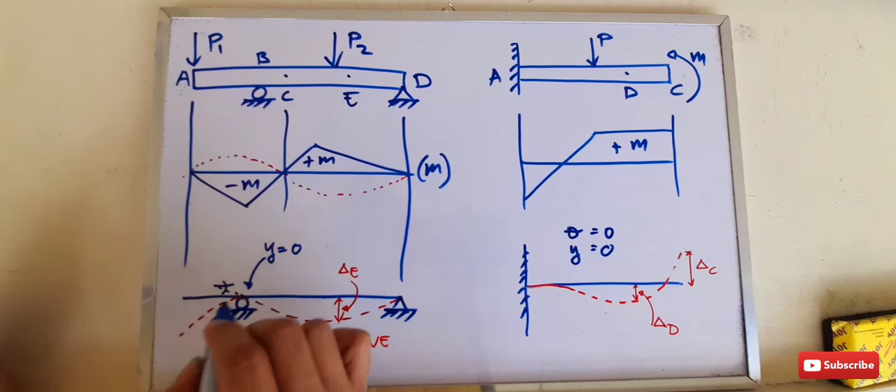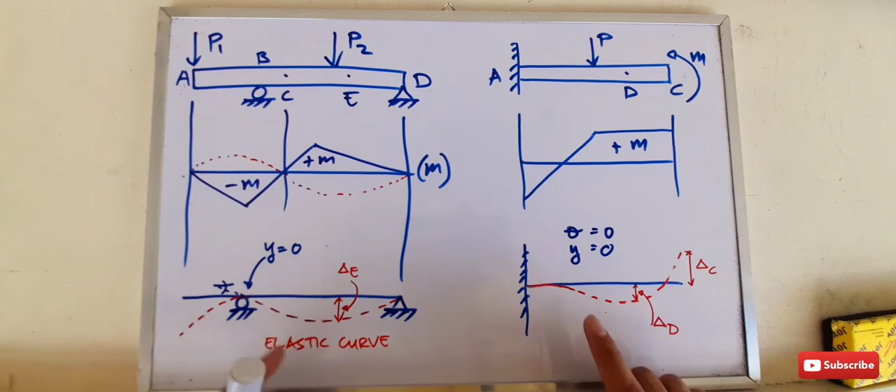These will help us later to get the deflection, or the displacement and the slope, at certain points in our beam.

The first method in solving for your slope and deflection is by integration, also known as the double integration method, because we integrate twice.

The first integration will give us dy over dx, which is the slope of your deflection diagram or elastic curve. The second integration gives us y, the value of the displacement. This is the process of the double integration method.

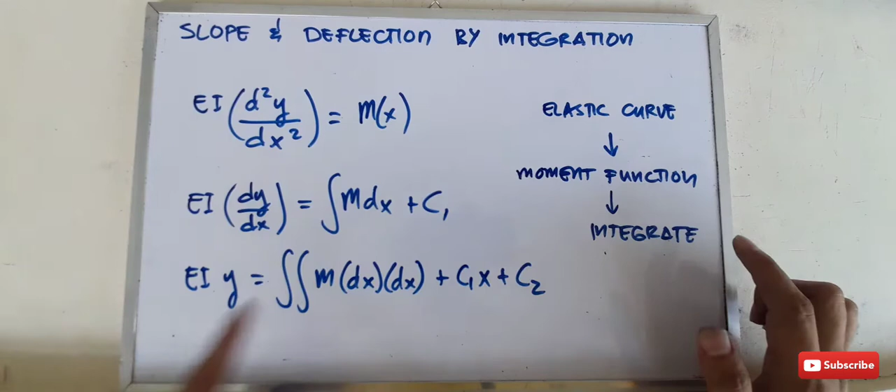First, we make the elastic curve or deflection diagram. Second, we make the moment function. And third, we integrate to get the slope and displacement of our elastic curve.

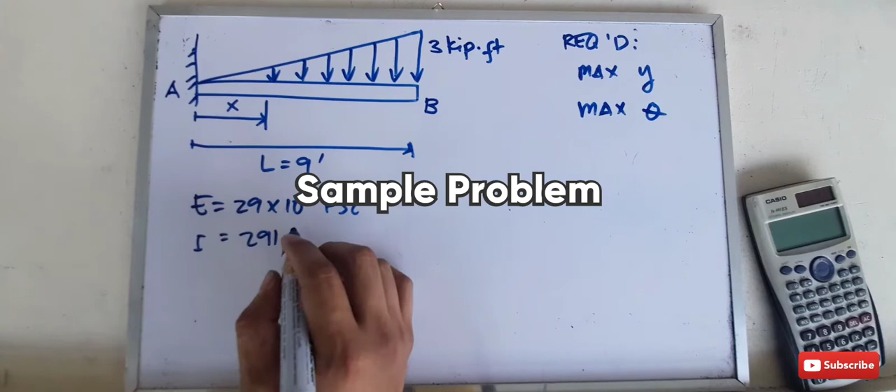For this problem, we're given the following data: a cantilever beam where point A is a fixed support and the overhang is point B. We're given a triangularly shaped distributed load with a maximum load of 3 kip per foot. This is a W14 by 30 steel beam, with I given as 291 inch^4, and the modulus of elasticity for steel as 29 times 10 to the 3 KSI. We're required to determine the maximum displacement and the maximum slope in the beam.

As stated earlier, our first step in determining the slope and deflection is to illustrate the elastic curve. We know that at the fixed support we will have no displacement and no slope, so the elastic curve is flat there, and then we will have something like this. So the maximum displacement is at the overhang—this is y max.

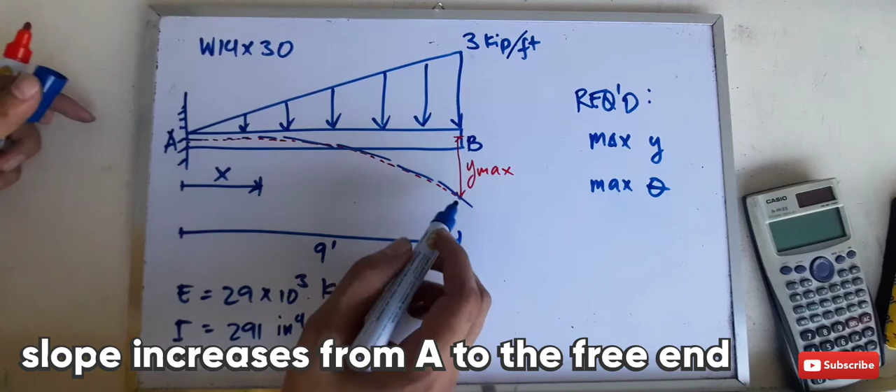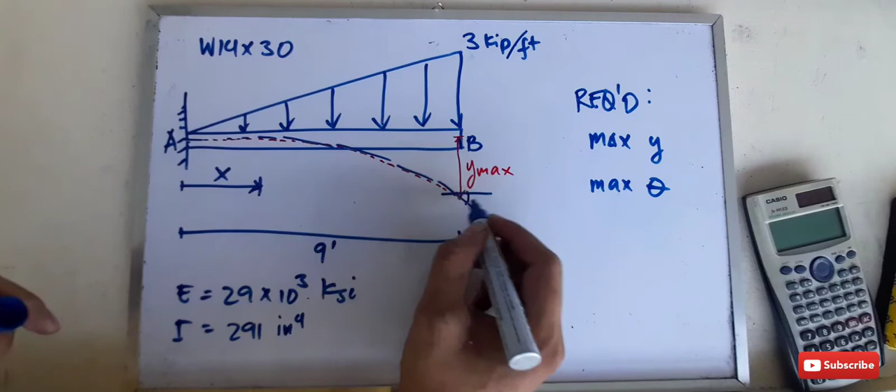Also the maximum slope will happen at this particular point. So dito makikita nyo, yung slope natin is 0. So ganun yung slope natin, no? Tingnan. So ang pinaka malaking slope natin ay mangyayari dito din sa point na to, sa overhang. At x equals 9 feet. So bali, nag-change yung slope mo ng ganyan. Ito yung maximum na slope. So ito yung maximum slope mo ngayon. This is your maximum slope.

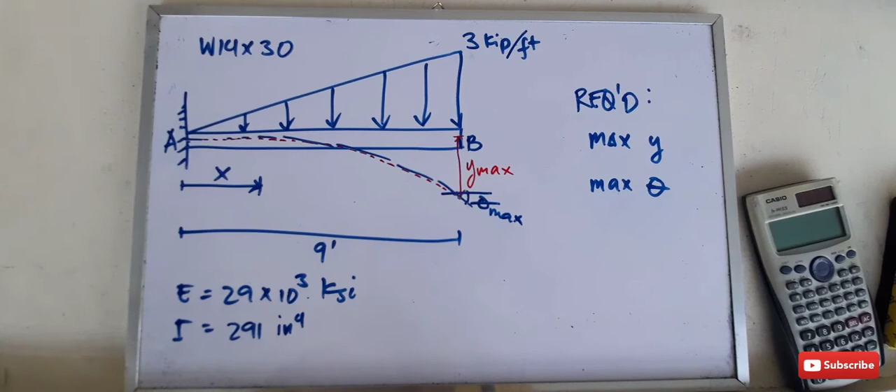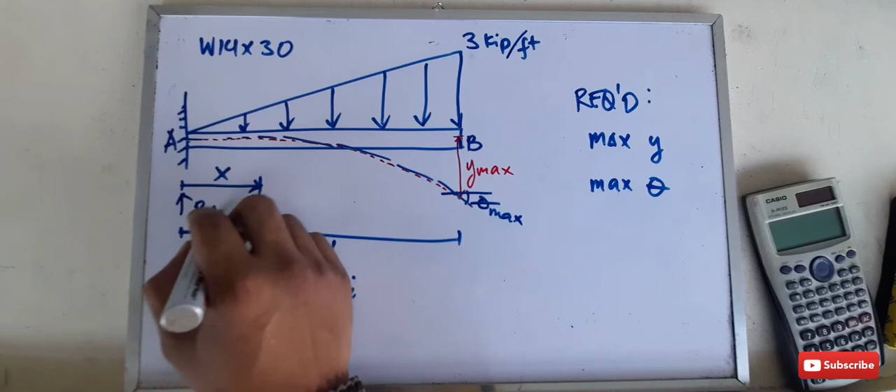So ang second na step is to derive an equation for the moment function as a function of the distance x. So bago natin yan makuha, yung moment equation, kunin muna natin yung reaction at A, yung RAY, and then you have the moment ng A. Diba kasi meron tayong dalawang forces na reaction dyan, tsaka isang moment.

Wala naman tayong ibang forces na involved dito. We have summation of forces lang. Summation of forces along y equals 0, magiging RAY is just equal to 1/2, 3 times 9. So RAY equals 4.5 times 3. We have 4.5 times 3, 13.5 kips.

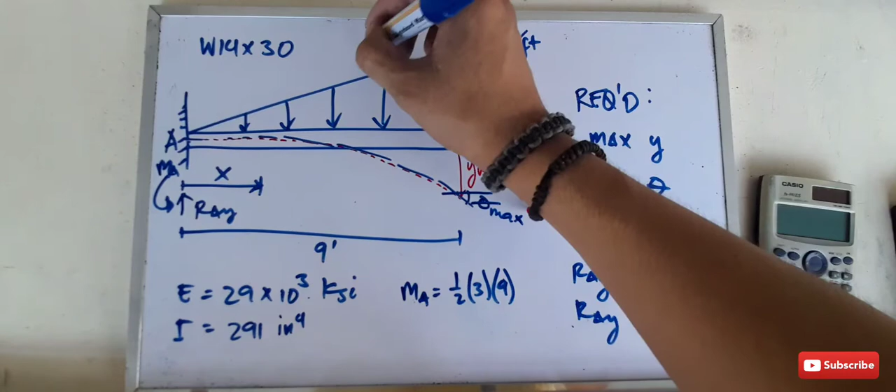At yung moment natin, summation of moment at A, for example, we have MA equals 3, 1/2 na naman. We have 1/2, 3 times yung length na 9, times moment arm na, pag dito, ang resultant natin ay nasa 2/3 of the length. Pag dito naman, ito yung 1/3, 2/3. So 2/3 of 9. So moment A natin equals, ito cancel, ito naman cancel. So 9 times 9 is 81, kip-foot. So meron na tayong moment ng A sa reaction.

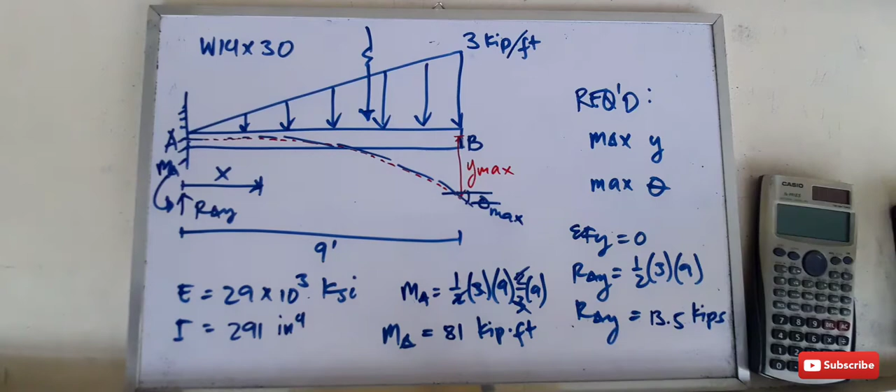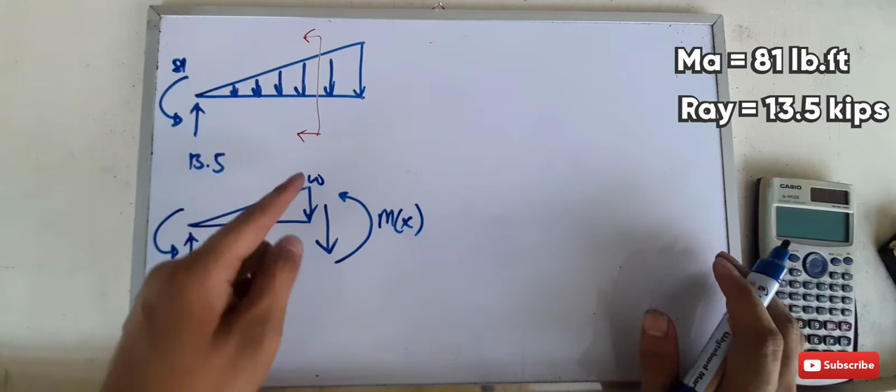Meron tayong reaction at A na Y. Para makuha natin yung moment equation, kailangan lang natin na mag-cut ng section dito somewhere sa ating beam para makuha natin yung single na moment equation as a function of your distance x. Ngayon, kasi hindi naman uniform yung load natin, at saka hindi rin natin alam kung saan yung x natin na distance, hindi natin alam agad kung ano yung height o ano yung load dito sa distance na ito.

So kailangan natin kunin yung W as a function of x din. So meron tayong similar triangle na gagawin. This is 3, this is W, this one is x. Ito namang mas na distance is x. This is 9. This is x. So merong 3/9, and then you have W over x. Tama ba? You have 3 divided by 9 tas W over x. So W is just 1/3 x, or x over 3. So ito ay x over 3, as a function of x na siya na yung W.

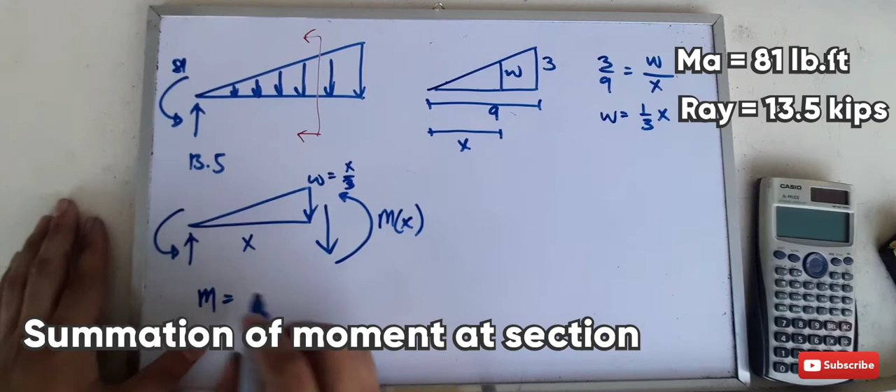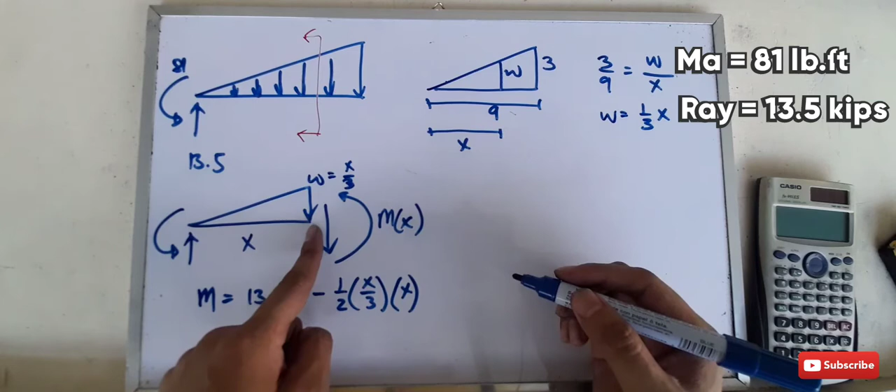So ang moment natin, equation for our moment, is just equal to, we have 13.5 dito. So ang 13.5 ay papunta dito. So you have 13.5x. Ito naman ay minus, we have x over 3, or 1/2 muna, 1/2 base times height. 1/2, x over 3, times x. Tapos yung moment arm niya, syempre dito tayo nagmo-moment, so moment arm niya is x over 3 din.

So bali, ito yung resultant ngayon ng ating triangular load. So 1/2 na height times base, x over 3 times base. Triangular na area, 1/2 base times height, times yung moment arm mo, which is equal to x over 3. So again, pag triangular, yung resultant ng triangle natin, ito ay 2/3 x, ito naman ay x over 3. So 1/3, 2/3. Pag nasa mas mahabang height, x over 3, pag base mo naman dito sa 0, that's 2/3 x. So sa mga hindi natapos yung statics dyan, yan, triangle. So ito yung resultant na triangular na load natin, 1/2 base times height times moment arm na x over 3.

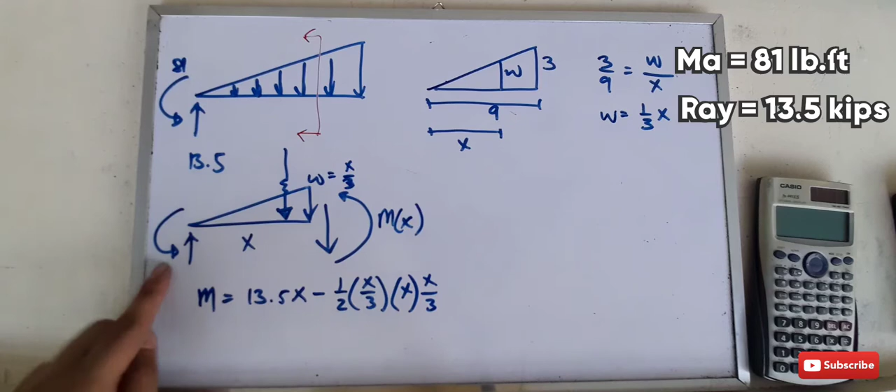Tapos meron pa tayong isang moment na minus din kasi pareho sila ng direction dito. We have 81. Wala nang x kasi moment na to, so wala nang moment arm. So simplify lang natin. M as a function of x equals 13.5x minus 1/2 or 3 times 3, that's 9 times 2, 18. 1 over 18 x cubed minus 81. Okay, so meron na tayong single moment equation para sa buong beam.

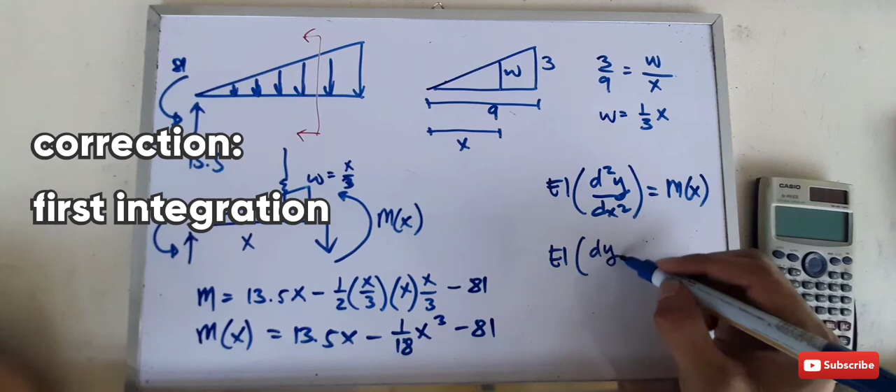Ang next natin gagawin is to integrate your EI, d squared y over dx squared equals M as a function of x. Tapos for the first integration, meron tayong dy over dx equals yun integral ng mdx natin plus C. So dito makukuha na natin yung slope.

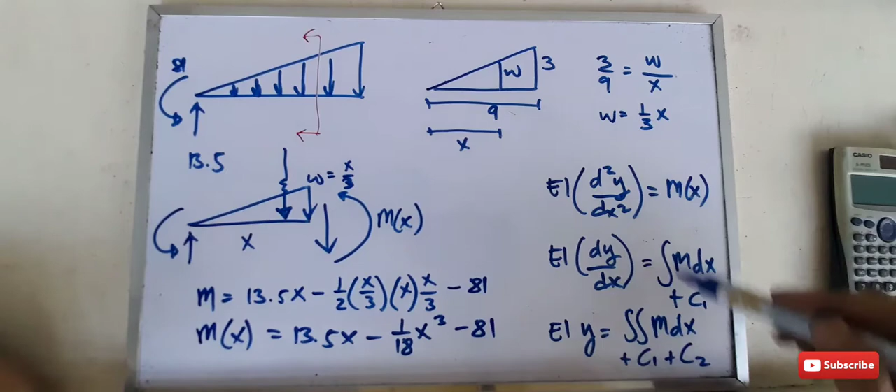At third naman, meron tayong y, double integral na ngayon ng mdx. Meron tayong ito c1 pa lang to dito. Meron tayong dalawang constant na, c1 plus c2. So ito yung unang gagawin natin, and then integrate natin para makuha to, and then integrate na naman ulit para makuha yung displacement. So diretsuhan na natin d squared y over dx squared equals yung equation natin kanina.

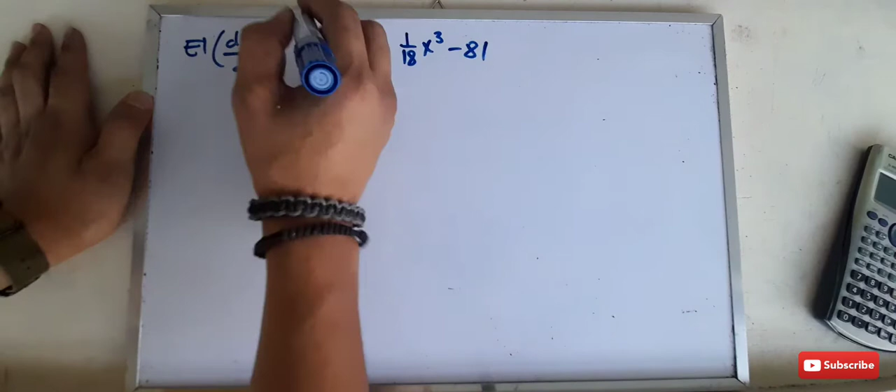Which is 13.5x minus 1 over 18 x cubed minus 81. So integrate, and then you have to integrate din. Meron ka ng EI times dy over dx equals, so i-integrate lang natin to. We will have 6.75 x squared, kasi x squared over 2. Tapos meron tayong 1 over 18 divided by 4. That's 0.01389.

0.01389 x to the 4, minus 81x plus C1. So meron tayong isang constant na C1.

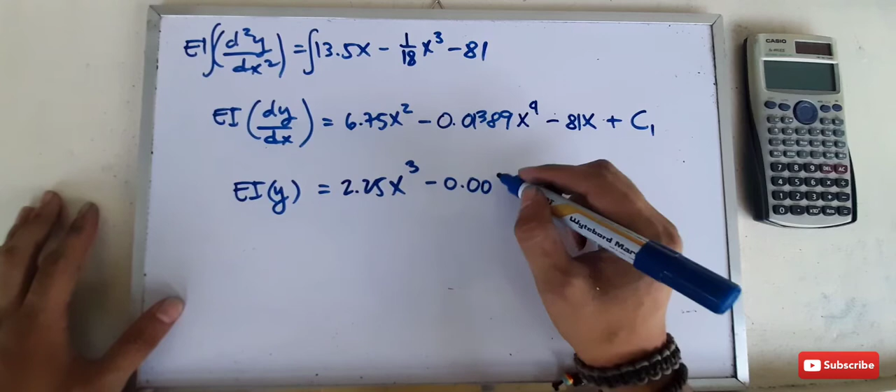Pag i-integrate natin ulit to, magiging EI y equals 2.25 x cubed minus 0.002778 x to the 5th.

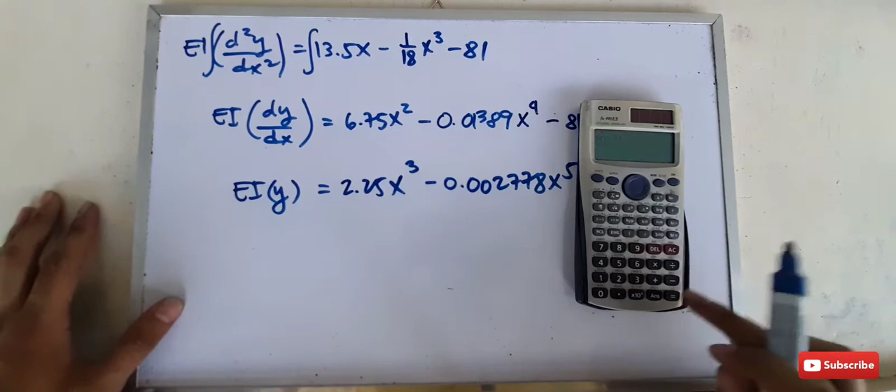So i-divide lang natin ng 5, no? 0.01389 divided by 5. Ito yan, no? 2.777 times 10 to the negative 3.

Ito naman, i-divide natin ng 2. We will have 40.5x squared plus C1x plus C2. So yun yung equation natin for pangalawang integration.

So ito na yung equation natin for slope. Ito naman yung equation natin for displacement. Given naman tayo ng E tsaka I, i-evaluate lang natin to yung distance na x equals 9 feet, kasi sabi natin kanina, dun yung maximum na slope and maximum displacement.

Pero kailangan natin kunin muna yung C1 and C2. So paano ba makuha yung C1 and C2? That will be using our boundary conditions.

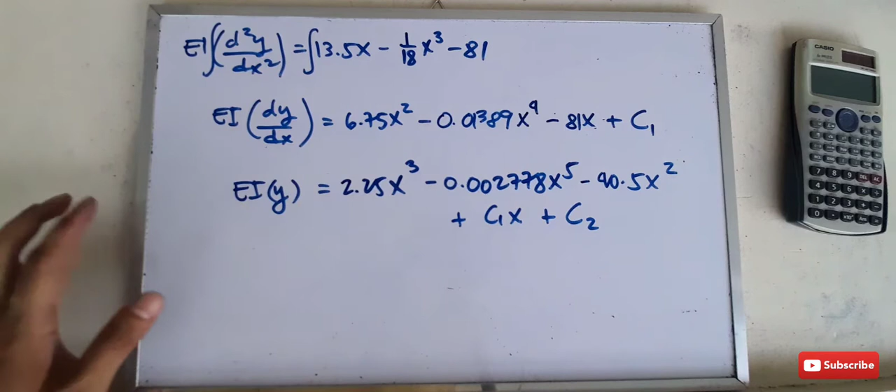So yung boundary conditions na na-mention natin kanina, yun yung gagamitin natin, yung known facts na pag support mo ay pin or roller, zero yung displacement. Pag support mo naman ay fixed, zero ang both displacement and yung slope.

Dahil fixed yung support natin at A, which is x equals 0, pwede nating sabihin na at x equals 0, yung dy over dx natin or yung slope equals 0, kasi nga fixed support. So isa-substitute lang natin tong boundary conditions na to para sa equation natin dito.

Makukuha na natin yung C1. So x equals 0, 0, 0, magiging C1 equals 0. Diba? Kasi 0, 0, 0, 0, C1 equals 0.

Next na boundary condition natin para dito, at x equals 0, ang y mo din, or the displacement, is also 0. So i-substitute lang natin tong x equals 0 and y equals 0 sa equation na to. You have 0, 0, 0, and this is 0. C2 will also become 0.

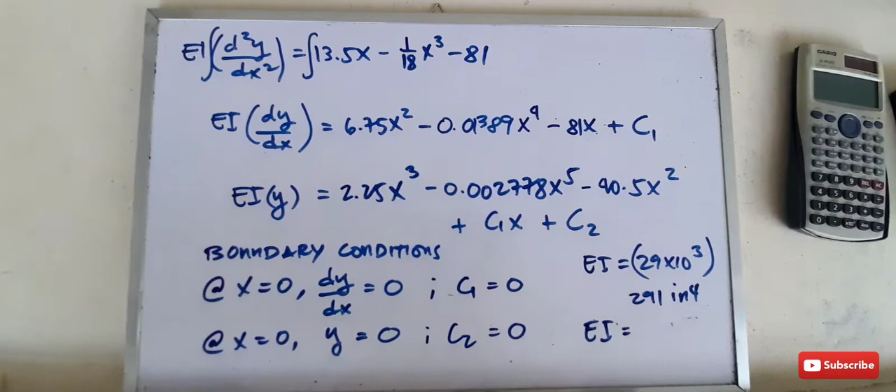Given tayo ng E tsaka I kanina, no, which is 29 times 10 to the 3 KSI times I, which is 291 inch 4. So we have EI equals 29 times 10 to the 3 times 291.

You will have 8,439,000. Makakancel yung 2 inch, no? So KSI pa rin yung resulting na unit. So 8,439,000. So pwede nating i-solve actually, no?

Diretso na nating i-solve. So kunin muna natin yung slope max at x equals 9 feet. Ito ay magiging 0. Ito naman ay magiging 0. This is 0.

We will have 6.75 times 9 squared minus 0.01389 times 9 raised to the power 4, parentheses minus 81 times 9, divided by your 8,439,000.

You will have negative 3, times 12 squared na conversion factor from feet to inches. So you will have negative 0.00466 radians.

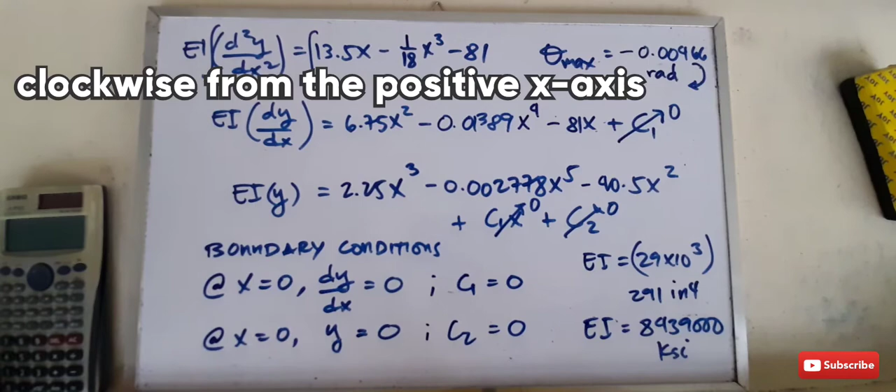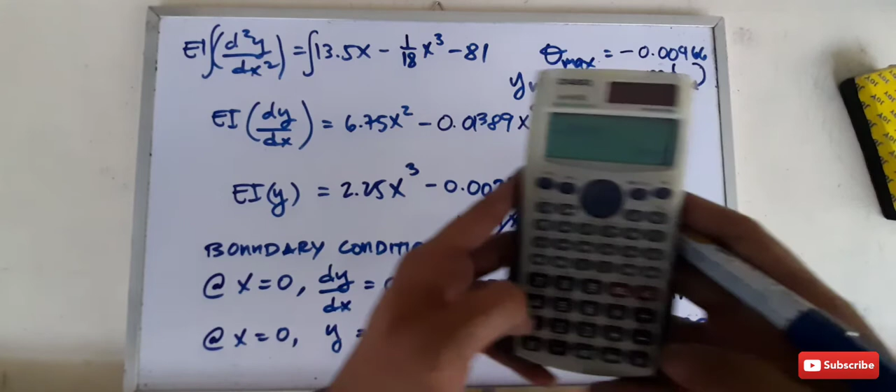For the displacement naman, y max, substitute lang natin dito yung 9 feet. So we have 2.25 times 9 raised to the power of 3 minus 0.002778 times 9 raised to the power of 5 minus 40.5 times 9 squared.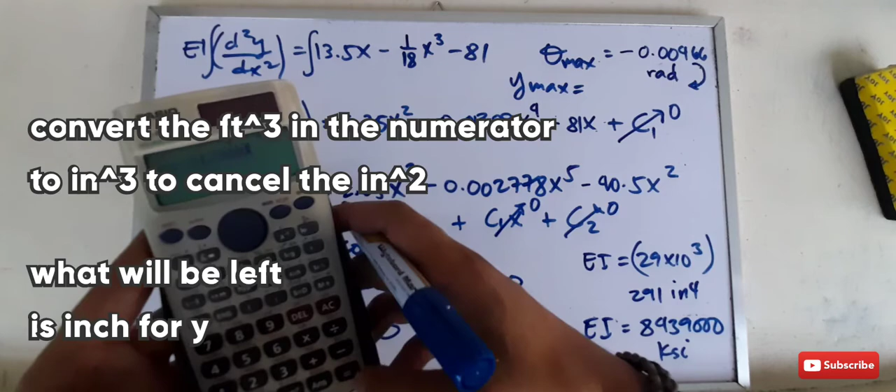Times ulit conversion factor na cube, by 8,439,000, of 0.369 inches, 0.369 inches downward, kasi negative yung nakuha natin.

Kung makikita nyo sa calculator, that's negative. Ibig sabihin, yung Y-max mo ay directed downward. Ito namang slope mo ay directed below. Parang ganito, no? Yan yung theta mo.

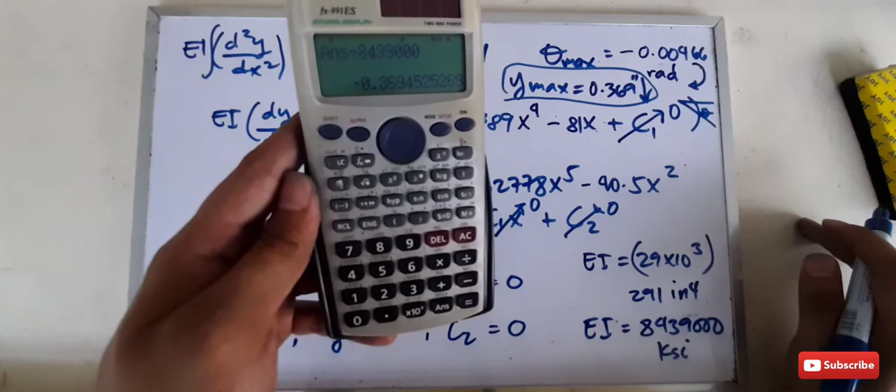Okay, so yun, naman sa drawing kanina na kung ito yung beam natin, tapos ganito yung deflection. So downward yung deflection natin, y, kaya negative.

Ang slope naman natin is negative slope kasi downward siya, clockwise from the horizontal axis, no, or the x axis. So yun lang yun, no?

Double integration. Sasagot pa tayo ng mga sample problems sa ibang video. So thank you again for listening at sana ay medyo hindi confusing yung solution natin.